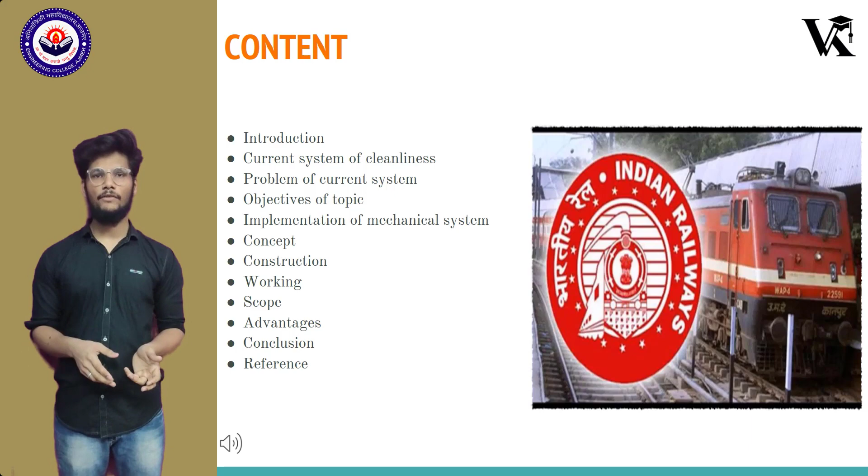Now we will start with the introduction. Railways are the most preferred mode of transport for the masses in India, running 9,000 trains, reaching 8,000 stations, and handling approximately 1.4 crore passengers per day. It's one of the public facilities given by government and manages the fourth largest network in the world by size, with a route of 95,981 kilometers as of March 2019.

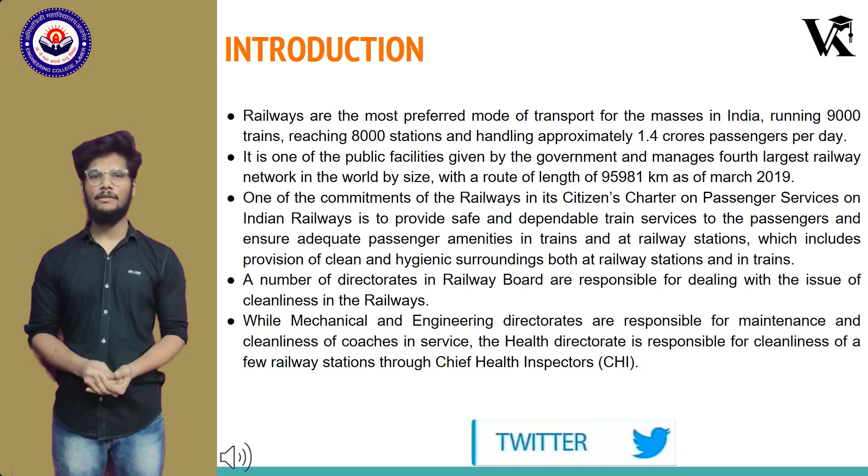One of the commitments of the railway in its citizens charter on passenger service on Indian Railway is to provide safe and dependable train service to passengers and ensure adequate passenger amenities in trains and at railway stations, which include provision of clean and hygienic surroundings both at railway stations and in trains. While mechanical and engineering directorates are responsible for maintenance and cleanliness of coaches in service, the Health Directorate is responsible for cleanliness of a few railway stations through Chief Health Inspectors.

So here we will discuss the current system towards cleanliness on platforms and trains. The current system of sewage disposal from railway coaches is known as the Hopper toilet system. The traditional method of disposing human waste from trains is to dispose the waste onto the tracks using what is known as a Hopper toilet system.

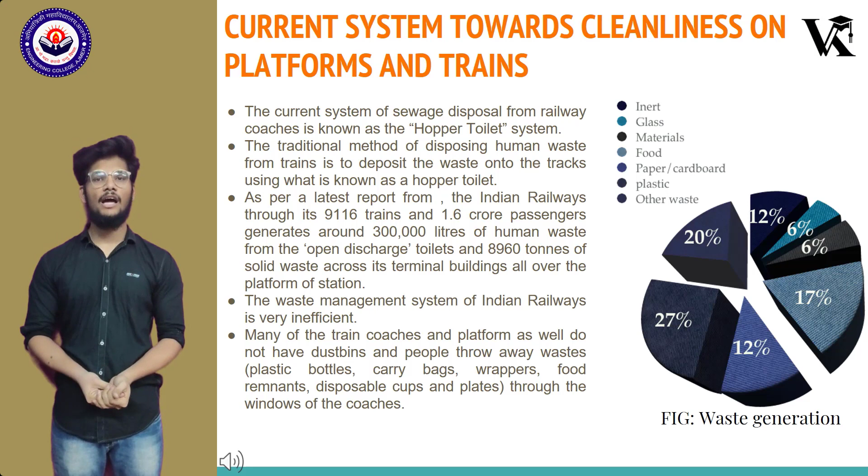The waste management system of Indian Railway is very inefficient. Many trains, coaches, and platforms do not have dustbins, and people throw waste through the windows of the coaches. Here's the diagram of waste generation by percentage: inert 12%, glass 6%, materials 6%, food 17%, paper 12%, plastic 27%, and other waste 20%.

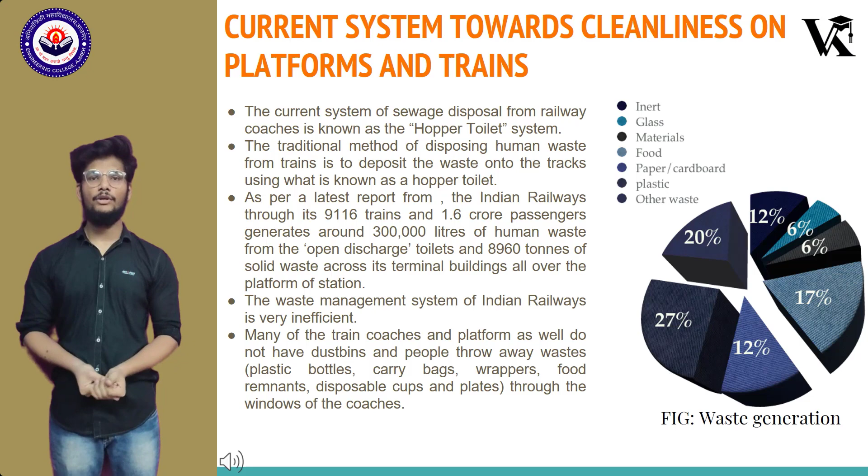So now there are the problems of the current system, which are environmental impact, health concern, no effective action, sources, violation of rules and regulations, water contamination, and impact on planet. First is environmental impact.

It is the biggest mobile source of environmental pollution, transporting virus, harmful, deadly disease-causing microorganisms by spreading them on tracks, rivers, streams, etc. Health concern: human waste contains a large number of germs that cause diarrhea, typhoid, hepatitis, other water-borne diseases, and parasite infection.

No effective action: Railways have neither any mechanism to assess or control the level of expenditure or maintenance of cleanliness in stations and trains, nor a policy on waste management. Sources: according to a source, the railway network has been declared a huge dustbin.

Violation of rules and regulation: the railway's action flouts the Environmental Protection Act, disobeying it through the current system. Water contamination: hazardous waste in the environment leaches into the ground and ultimately into groundwater. This water is used for many things, from watering local fields to drinking. Toxic liquid chemicals from waste can also seep into water streams and bodies of water.

Impact on planet: we only have one planet, and our careless handling of waste is harming it. Taking care of the environment is everyone's responsibility, for ourselves, for our planet, and for our children as well.

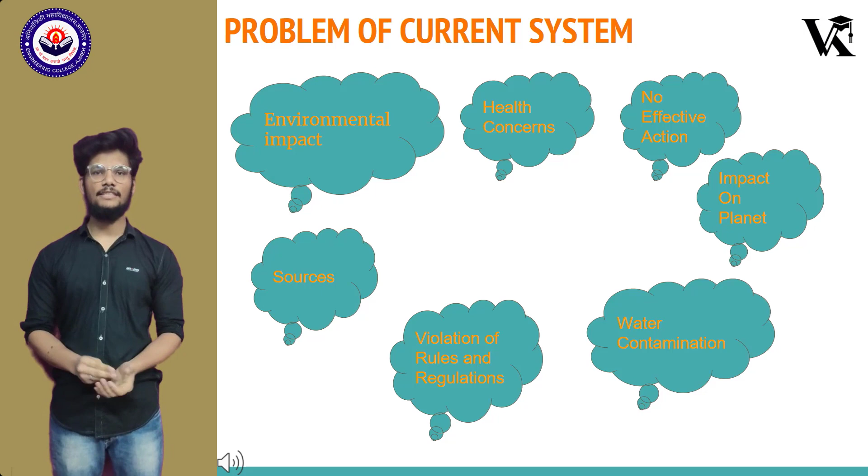So now here are the objectives of the topic. The aim of this project is to control the problems produced due to human waste discharged on railway platforms. Not only the human aspect, but also to protect the life of the railway track from corrosive losses.

It minimizes air pollution at the railway platform, increases the life of the railway track, and reduces the cost required for cleaning of the platform.

The main objective of choosing this topic over others is because of our present condition due to coronavirus, and it's also a necessary thought and action towards a safe future. It's a futuristic implementation to reduce the chance of causing a pandemic like COVID-19 in India.

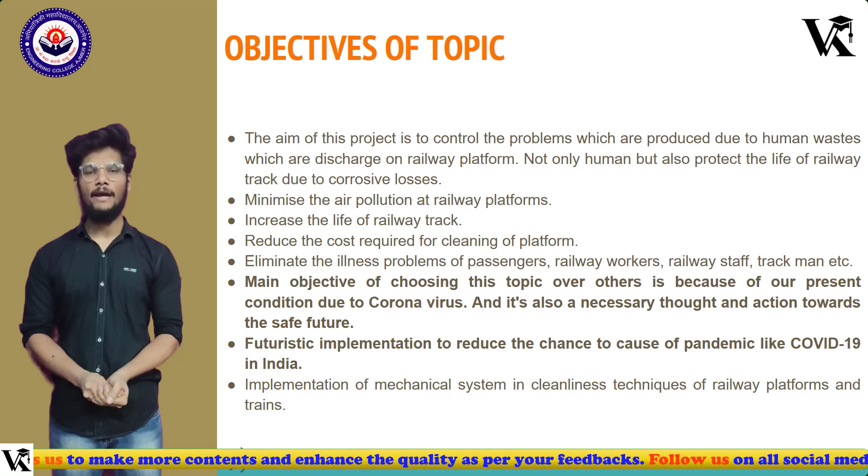So here is the implementation of mechanical system in cleanliness techniques. Considering the problem of waste in Indian Railway, we are developing a system which would help keep the station and nearby area clean. This system is fully based on mechanical linkages and is highly reliable and less expensive to implement. Without any modification in present coaches, this system can be implemented.

So here is the diagram of flow of methodology, the steps which we will follow. First is initial study, second is design of component, third collection of material, fourth manufacturing of component, fifth assembly of component, sixth analysis and testing, and then conclusion.

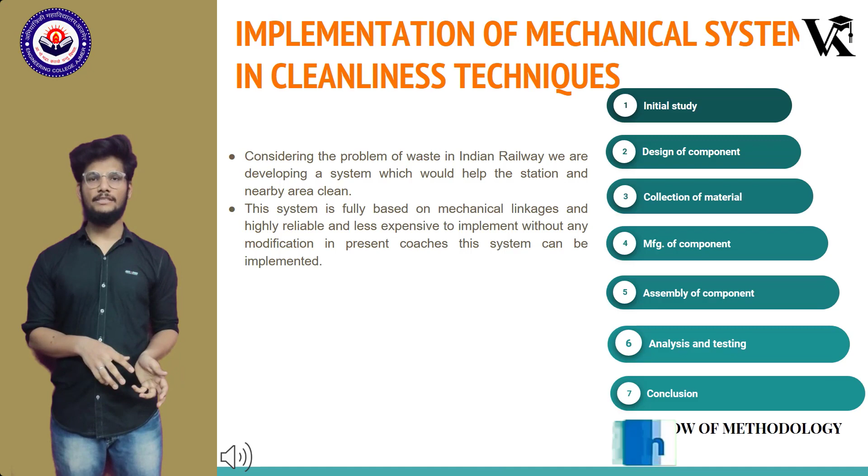So the principle is, this system is based on the principle that when a railway train approaches near the station, its speed goes on gradually decreasing, and when it leaves from the station, its speed gradually increases. The change in speed of the railway train is used to operate the governor, which in turn is used for operation of the human waste disposal system.

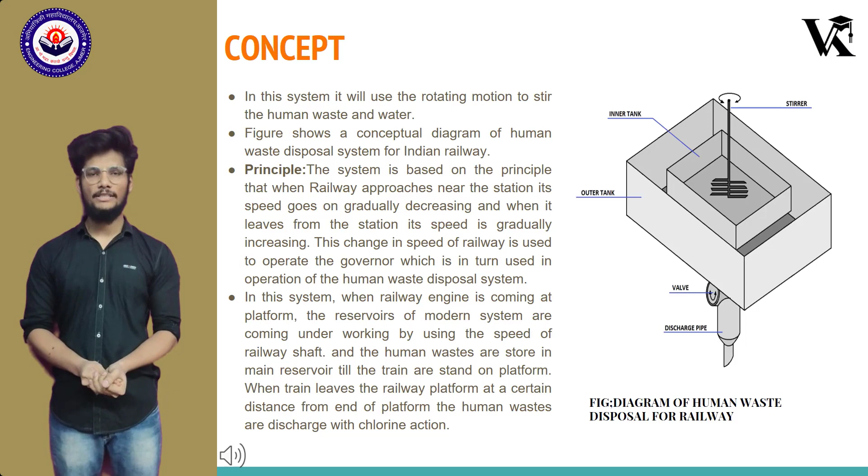In this system, when the railway engine is coming at the platform, the reservoirs of the modern system come into working by using the speed of the railway shaft, and the human waste is stored in the main reservoir while the train stands on the platform. When the train leaves the railway platform, at a certain distance from the end of the platform, the human waste is discharged with chlorine action.

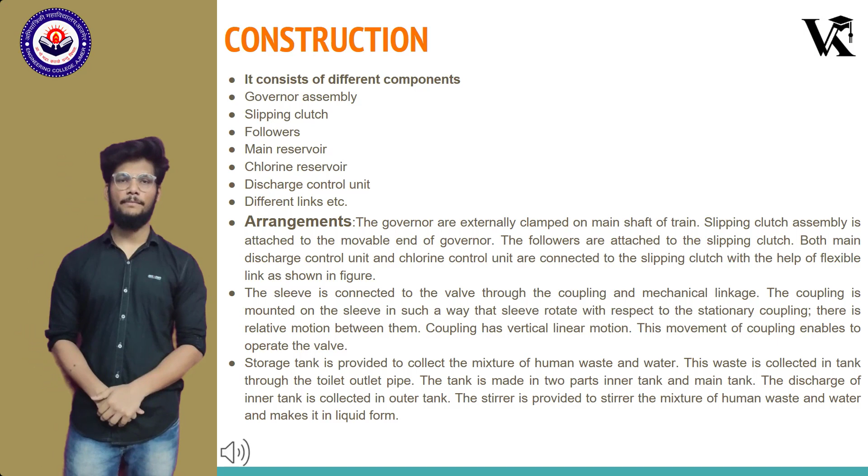The governor is externally clamped on the main shaft of the train. The slipping clutch assembly is attached to the movable end of the governor. The followers are attached to the slipping clutch. Both the main discharge control unit and chlorine control unit are connected to the slipping clutch with the help of flexible links as shown in figure.

The sleeve is connected to the valve through the coupling and mechanical linkages. The coupling is mounted on the sleeve in such a way that the sleeve rotates with respect to the stationary coupling. There is relative motion between them. The coupling has vertical linear motion. This movement of the coupling enables it to operate the valve.

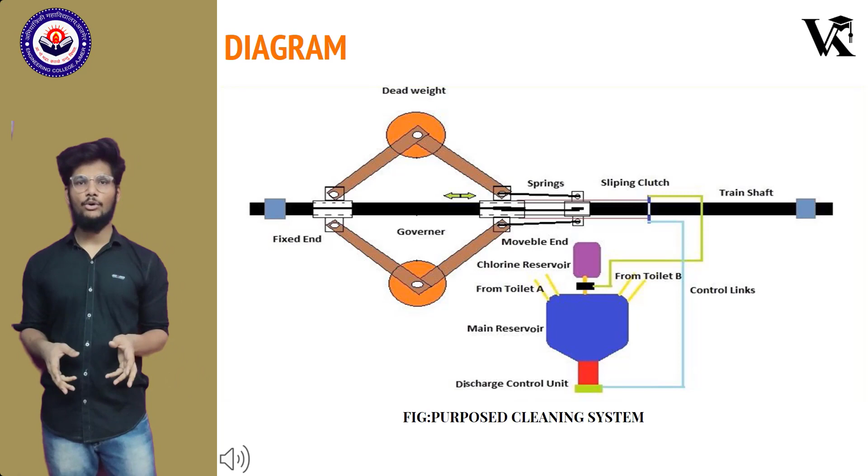A storage tank is provided to collect the mixture of human waste and water. This waste is collected in the tank through the toilet outlet pipe. The tank is made in two parts, inner tank and main tank. The discharge of the inner tank is collected in the outer tank. The stirrer is provided to stir the mixture of human waste and water and make it into liquid form.

So now the working of the proposed system is as follows. In this system, we utilize the governing action of the governor to operate the valve through the links. The governor is connected to the motor through a V-belt and pulley arrangement. As per the rule of Indian Railway, the loco pilot must obey the instructions about the speed limit of the train before entering the railway platform. The speed limit is below 30 km per hour.

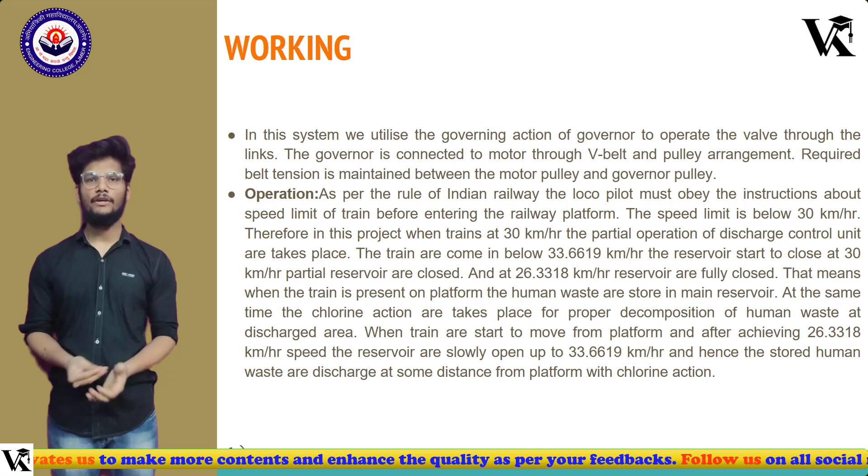Therefore, in this project, when the train is at 30 km per hour, the partial operation of the discharge control unit takes place. The train comes in below 33.6619 km per hour. The reservoir starts to close at 30 km per hour. The reservoir is partially closed, and at 26.3318 km per hour, the reservoir is fully closed. That means when the train is present on the platform, the human waste is stored in the main reservoir. At the same time, the chlorine action takes place for proper decomposition of human waste at the discharge area.

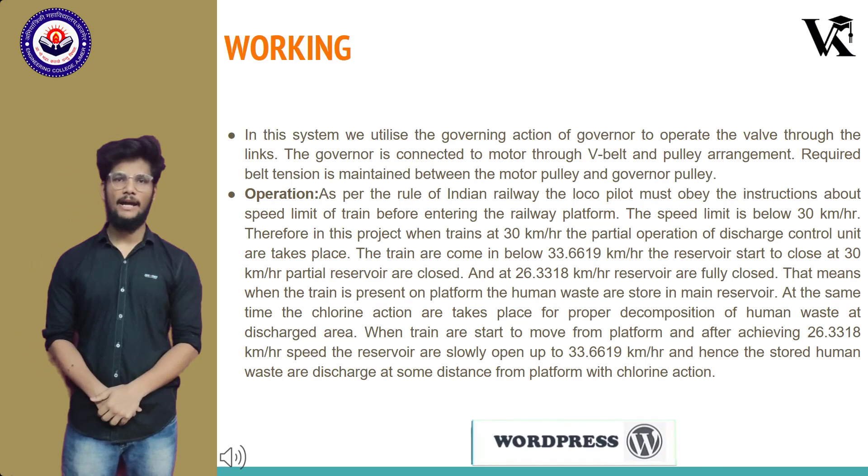When the train starts to move from the platform and after achieving 26.3318 km per hour speed, the reservoir slowly opens up to 33.6619 km per hour, and hence the stored human waste is discharged at some distance from the platform with chlorine action.

So now we will discuss the scope of this proposed system: it provides comfort to passengers, trackmen, staff members, etc. It eliminates the effort required for cleaning. It can easily be installed in the conventional system with minimum changes in its design aspect. The whole system is operated fully automatically. It does not require any maintenance. The installation cost is lesser than other systems.

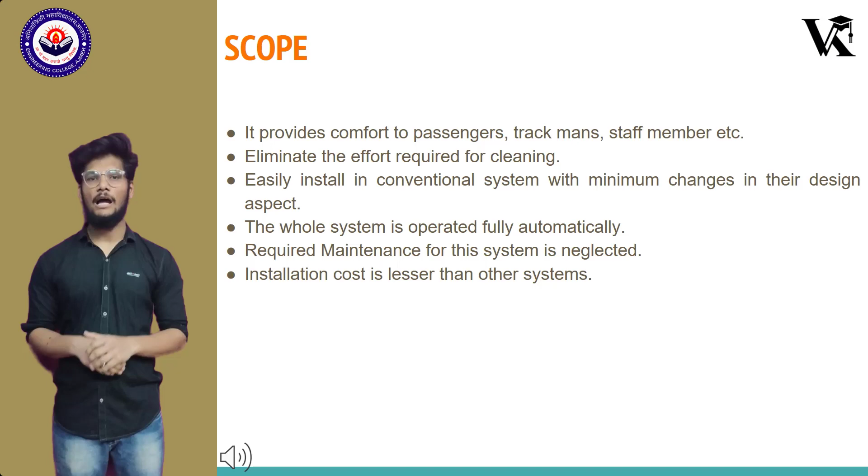So now here are the advantages of the proposed system: it's compact in size and shape, it will protect the platform from solid waste and corrosion, it's lightweight, it has lower maintenance as well as installation cost, and it's an eco-friendly system. Again, the main advantage is focused on our present condition and future implementation. It will reduce the chances of problems and harmful effects developed by waste everywhere.

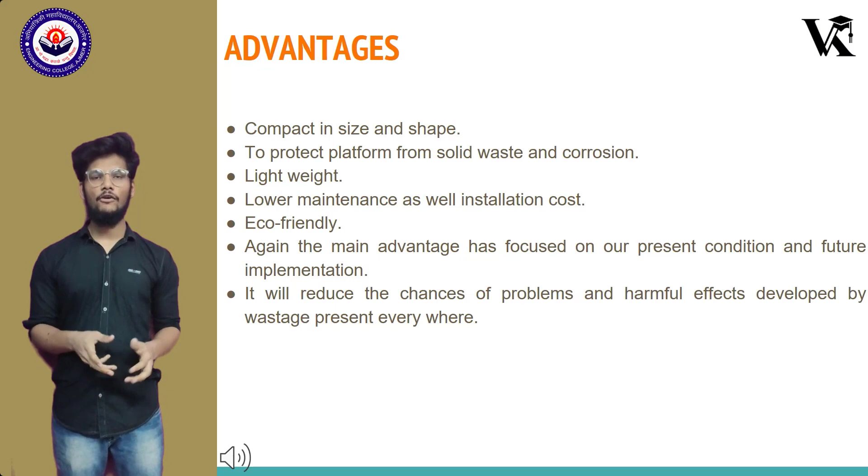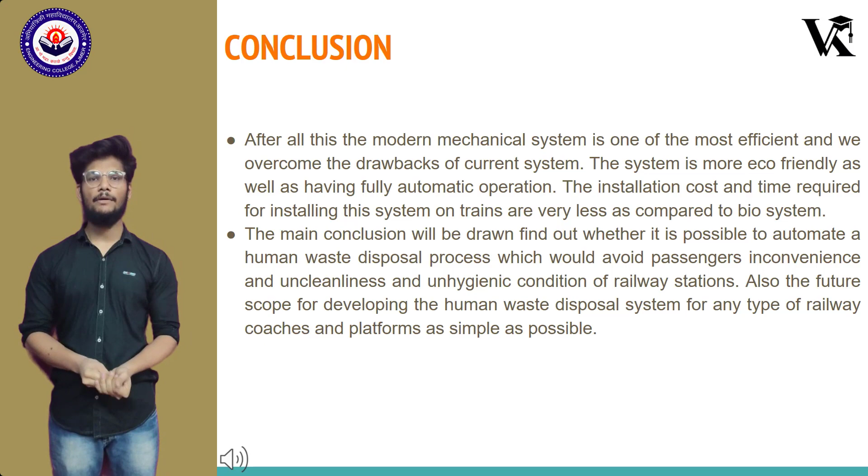So now we have reached the conclusion of the proposed system. The conclusion is, after all this, the modern mechanical system is one of the most efficient, and we overcome the drawback of the current system. The system is more eco-friendly as well as having fully automatic operation. The main conclusion drawn is to find out whether it's possible to automate a human waste disposal process which would avoid passenger inconvenience and the unclean and unhygienic condition of railway stations. Also, the future scope is developing the human waste disposal system for any type of railway coaches and platform as simple as possible.